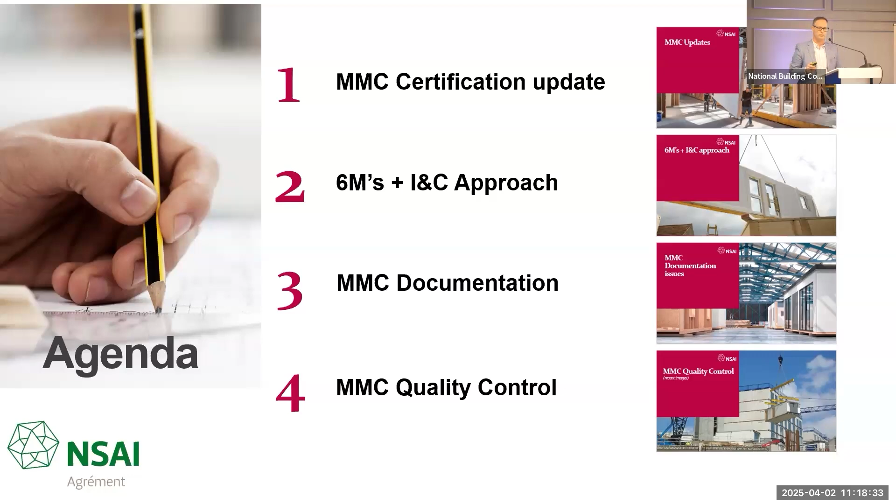So if I just move on to the updates, we have to go back to Technical Guidance Document Part D. That is where NSAI is referenced in Agrement certification. There is no European, there is no global standard for MMC. Yes, the BSI published the PAS 8700, but it's only for residential construction and it's only a publicly available standard. So for us to accelerate, what's happening is rules and regulations are trying to catch up with the advancement and innovation happening in the modern methods of construction space.

It's for any new or innovative building materials or systems or processes, and that's where Agrement comes into place. We were mentioned in the Programme for Government. We're here to support that, and we're to bridge the gap because there is no CE marking standard for MMC, and it's only for products. But we're looking at the whole building systems, all 67 building elements - the walls, the doors, the frames - and we're also looking at the interfaces.

So like what the previous speaker showed you, the connections, the points of connection, the interfaces - they're the challenges for us. And then there is a European technical assessment, but that is like a visa - it's only a visa to place the product on a European market. It's not your passport to install, because you have to look at the different climatic conditions, the different locations that are in. So we have radon, but we don't have seismic activities that the Italians have. We have the storm Éowyn that we had recently - they don't have that on mainland Europe in some cases. So you've got to adapt your systems to the area and climatic and local conditions.

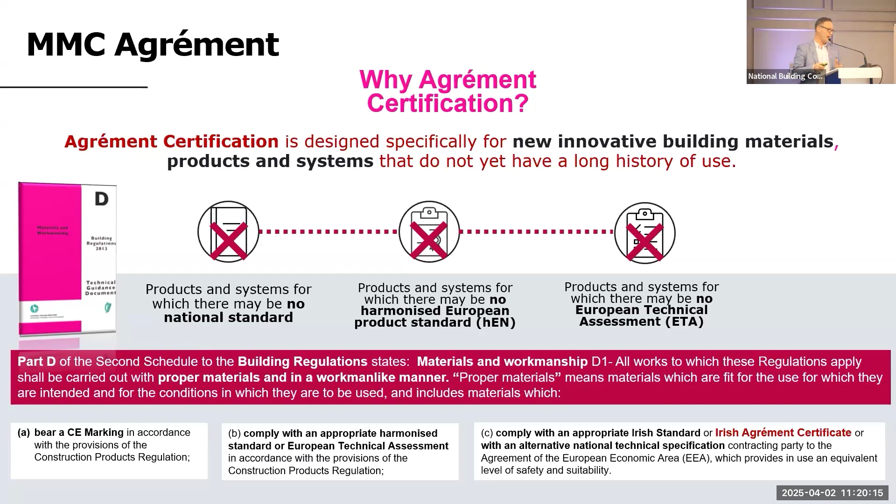And that's set out in TGD Part D. You then can have an Irish standard - we only have IS 440. There is a 3D concrete printing standard, but it's an ISO ASTM standard, and it's only general principles, so it doesn't cover all 3D concrete printing applications. And then you've got the Irish Agrement certification, which is to bridge the gap where there are no standards and regulations that I talked about.

But looking at the different companies, what I want you to look at here is very carefully - I haven't named the companies, but you can see the date of application and the material type in the second column. I also want you to look at the notes. So we have 7 stages within the Agrement certification process, and a lot of them are in technical review, but some don't come back to me - no correspondence since September 2024, no correspondence 2024.

We constantly reach out to these organizations - they've made an application, they've paid a fee, in some cases they've signed a contract with us, but there's no movement. And I can't make the move or can't move forward with them.

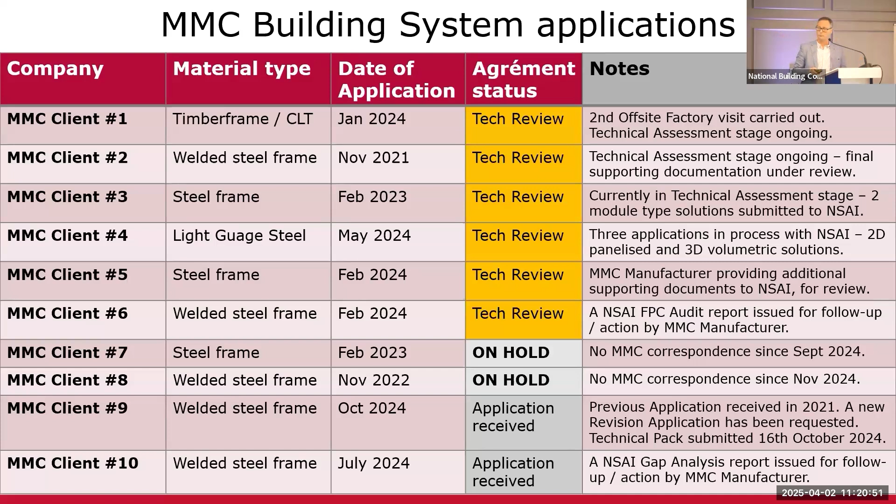We have other examples here of where they're at gap analysis stage. You can see the different types of steel frame - structured, welded steel, light gauge steel. Some haven't even confirmed what building system or technology they're going to use yet. You start to see ICF, mass engineered timber, structural insulated panels, precast, sandwich panels - so you're starting to see a good range here. Then some withdraw their applications or some want to put it on hold. We will have a kick-off meeting with them.

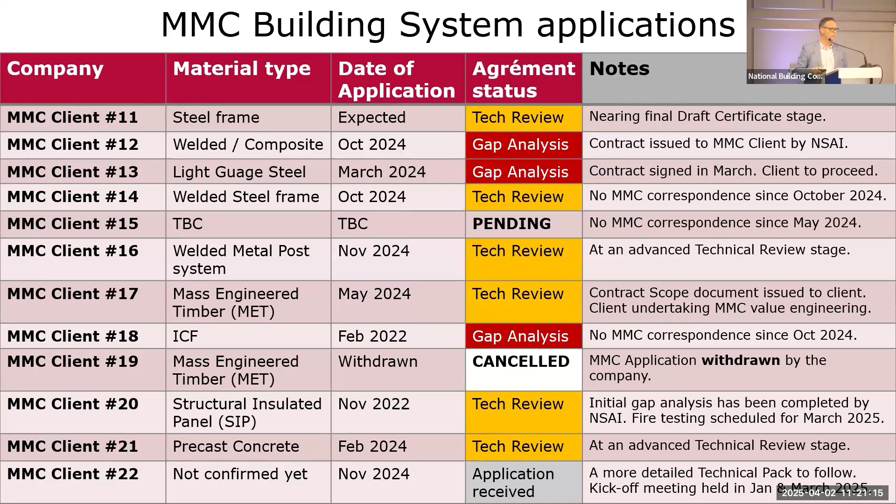We will work with the off-site manufacturers as best we can. There are different ones that have moved to gap analysis, and for us, we want them to get to the factory production control stage. This is where we're validating all their documentation, all their design, all the good stuff that they say they have. We want to verify that both in the factory and on site, and that's where the challenge starts coming into play.

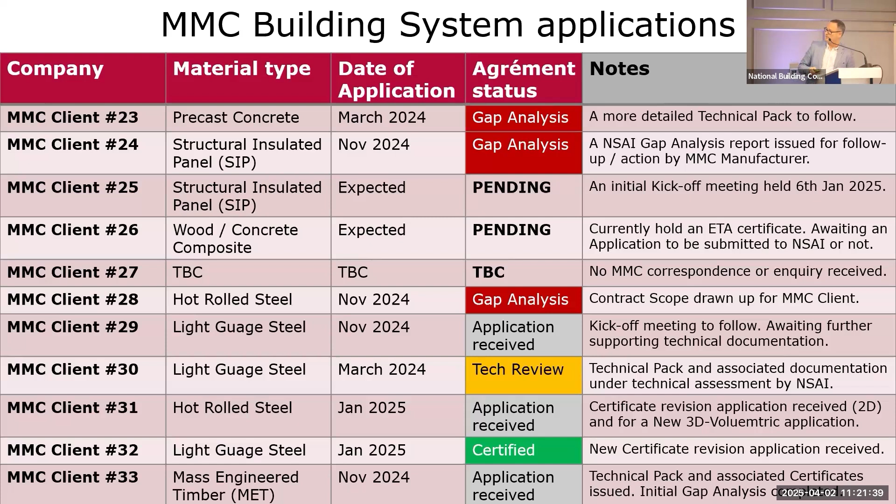But you can see where they're at: hot rolled steel, predominantly welded steel frame systems, and some people are just pending their application. It takes about 6 to 9 months from their initial inquiry to NSAI before they come into us and start the process. Then we do a gap analysis initially on what they submit, and it takes another 3 months before they give us a really detailed technical pack and we sign a contract with them.

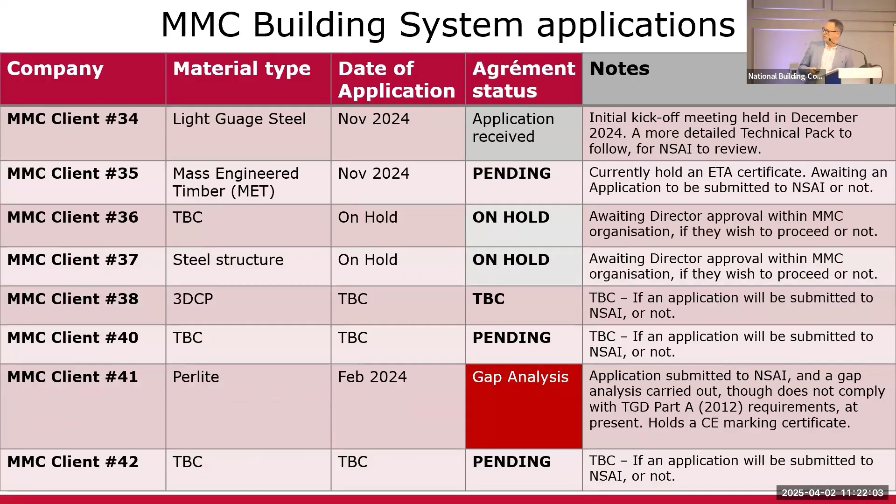So this is the challenges we're starting to see out there. For us, the summary is we want them to engage with us. Keep reaching out to us, reach out to our team. We're available, we're contactable. A lot of people have my name and number, they call me, whatever. We're happy to keep that process going. We're here to work with you.

We were set up under the NSAI Act 1996. We're also in our NSAI strategy to support SMEs, and we're in the programme for government to improve MMC certification. So that's what we're here for.

What we're also seeing is 3D volumetric systems have only started in the last 12 months. That's where it's starting to come into it. It's predominantly 2D panelized systems.

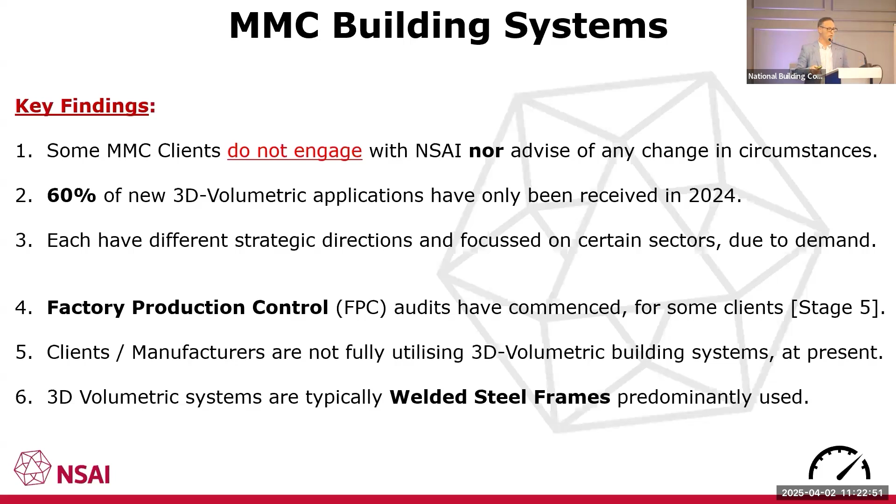What we see is when we get to the factory production control stage, we're at stage 5 of 7 - that's a real positive stage. That's when we know the factories are getting ready and they're going to be getting close to certification. We're looking at welded steel frames predominantly, although there's some mass engineered timber starting to make its presence here, possibly due to sustainability targets.

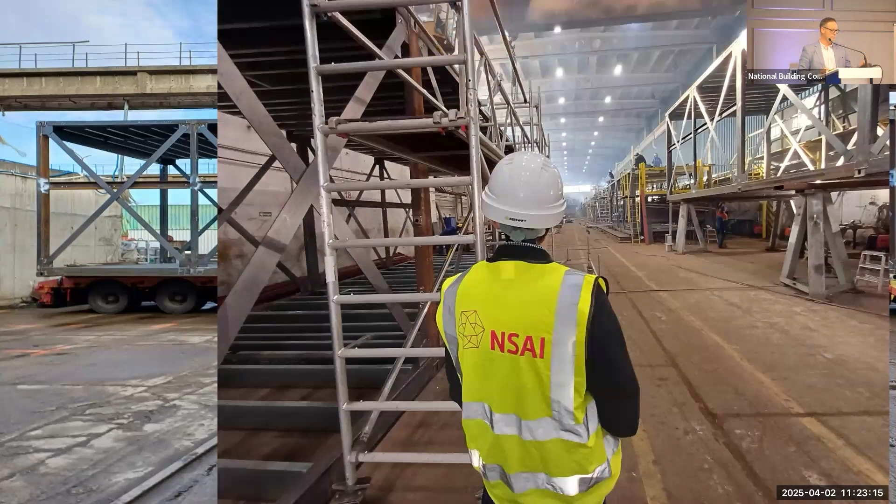This is looking down at the factory. This is one half of it, and there were 4 of them. You can see all the modules laid up all the way down the side and the guys working away in the crew.

This is some of the email comments I get back when I reach out to off-site manufacturers: 'Apologies, Martin, I'm working through the list that you gave me. I'm engaging with our clients and we hope to get back to you soon.' 'Martin, thanks for reaching out, thanks for your voicemail, thanks for your question, but we're not in a position to actively push forward with Agrement certification. However, can we keep our submission on hold?'

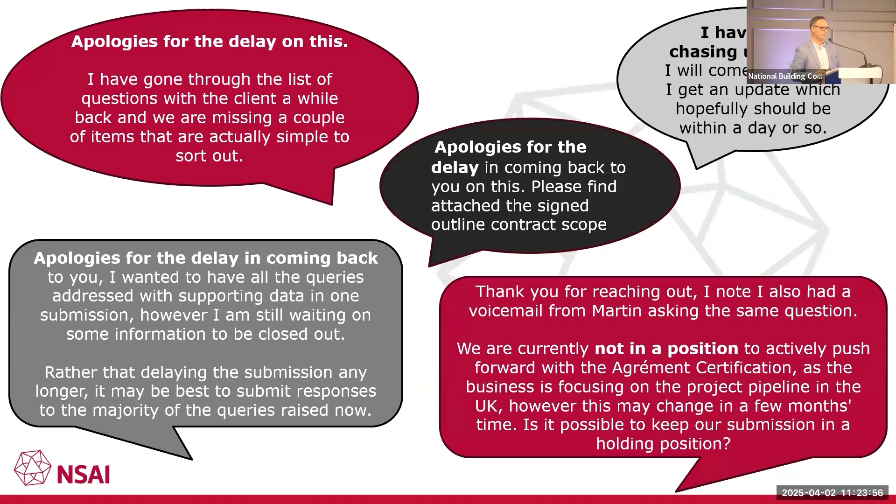This is the type of stuff - we want to work with off-site manufacturers, we want to work with them, but I can't move if they're not going to move forward. So it's a two-way street. You've got to come forward and present your documentation and we'll move forward with you.

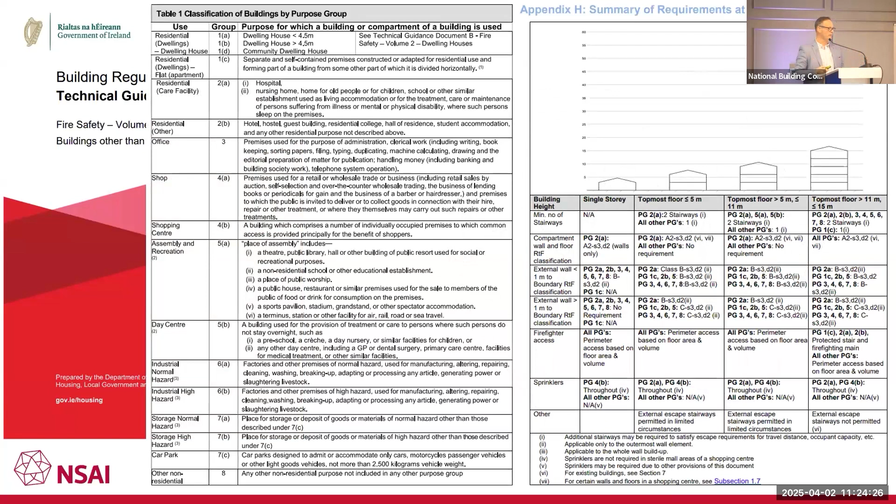What people always say is Agrement is not a one price or one fixed contract. No, it's not. It's based on the different purpose groups, the different heights of the buildings, the material technology and types, and the scale of the operation. So therefore, it can't be one size fits all - it's not a one size fixed price, fixed term contract. We need to scope that out with the various offsite manufacturers, and that will determine the length and depth of the certification process and technical assessment we have to carry out.

This is the 6 M's plus I and C's. I'll explain what that is in a minute, but I first want to talk about what is quality. This is a definition that holds true from 1978, and it still holds true to this day: it's the totality of features and characteristics of a product or service that bears on its ability to satisfy stated and implied needs. Very chunky, but I'll break it down for you.

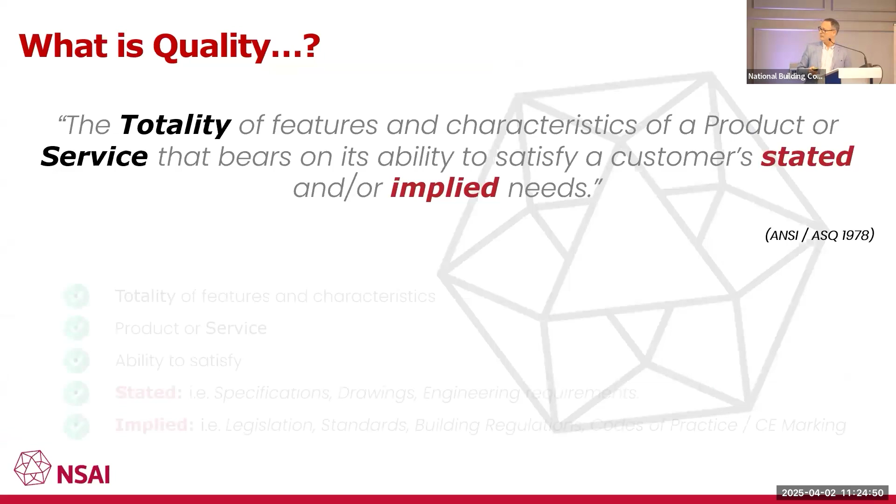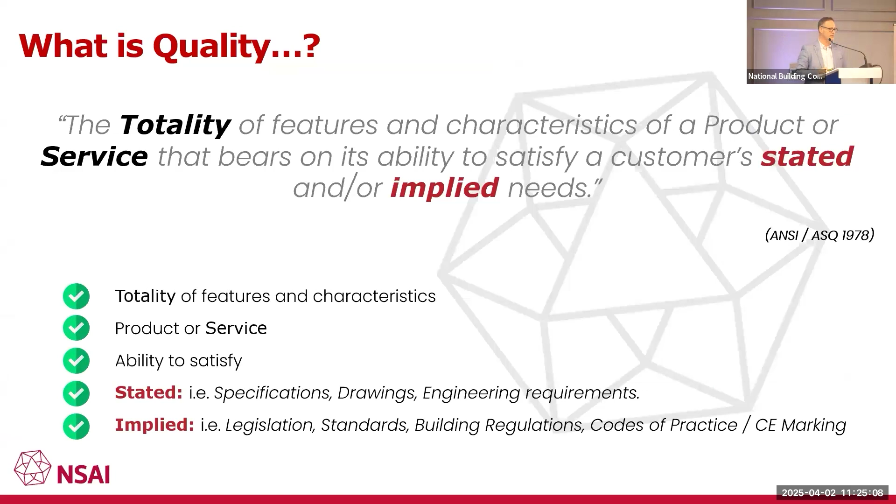What it is, is everything you do, the end-to-end process from this. It's no different to farm to fork, it's factory to site. It's the product that they're manufacturing, it's the ability, but it's not just the specifications, drawings, engineering, design. It is the legislation, the regulations, the standards, European directives, and the CE marking. It's everything to do with that, and the building regulations that we talked about earlier.

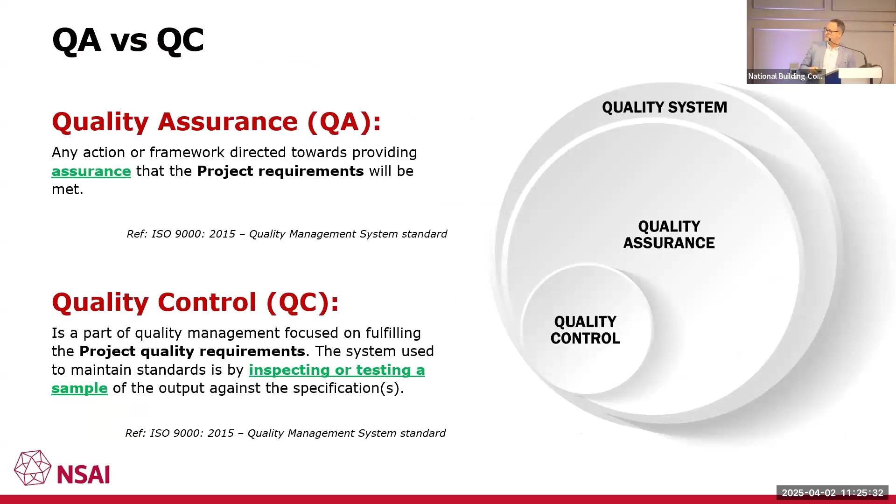Then you look at quality assurance, quality control. Everyone gets mixed up on this. The first one was quality management system and approach, but this is a definition from ISO 9000. It is an action or framework directed towards providing assurance, and quality control, as I always look at it, is materials and workmanship, both off-site and on-site, and how you control that. And it's inspection and testing of those samples, so you're taking a sample of that in the inspection process.

How that looks is we're providing a quality assurance scheme that is relied on by you as the certifiers, the regulators, the warranty providers, the insurers, and the regulator, the building control. And that's where it comes in.

But the BCAR is only on a project-by-project basis. So an example I give you, BCAR is not going to go to a factory in China. Are you going to travel over to China to look at some of our clients? Are you going to go to America? Are you going to go to Poland? Great if you are. But who's going to do the off-site inspections? Who's going to verify that? Who's going to validate all that documentation?

We get huge packs, over 10,000 pages on documentation. I'm happy to give it out to anyone here for them to digest and review technically, or you can rely on the Agrement certification to do that for you and support that. And that's what we hopefully rely on, and we want to work with people on that.

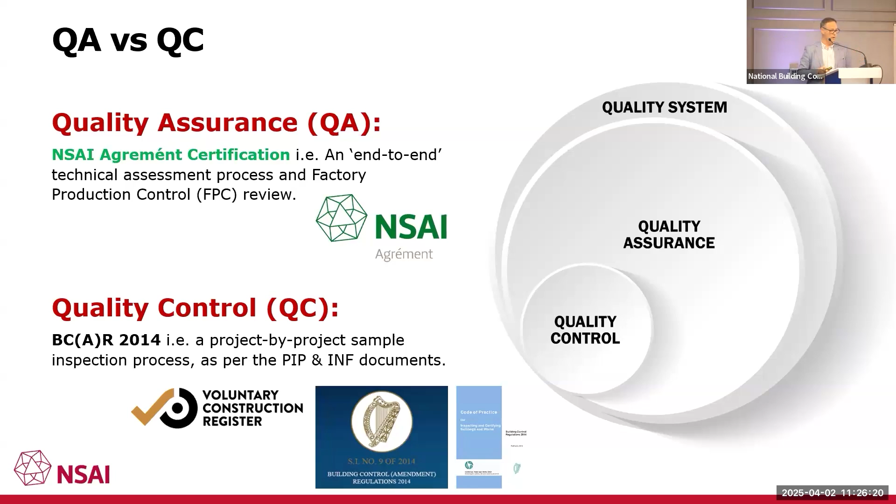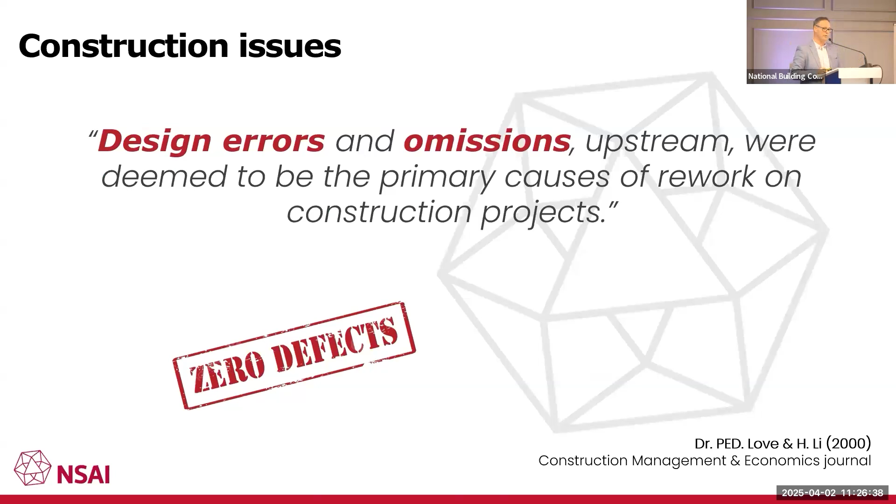And then I always use this definition. This is from Dr. Peter Love and Heng Li. They've written over 400 construction journals. He's in Australia and Heng Li is in Hong Kong. Design errors and omissions are the primary cause of rework in construction, and that is proven in multiple papers that they've published. And that's what we're trying to avoid.

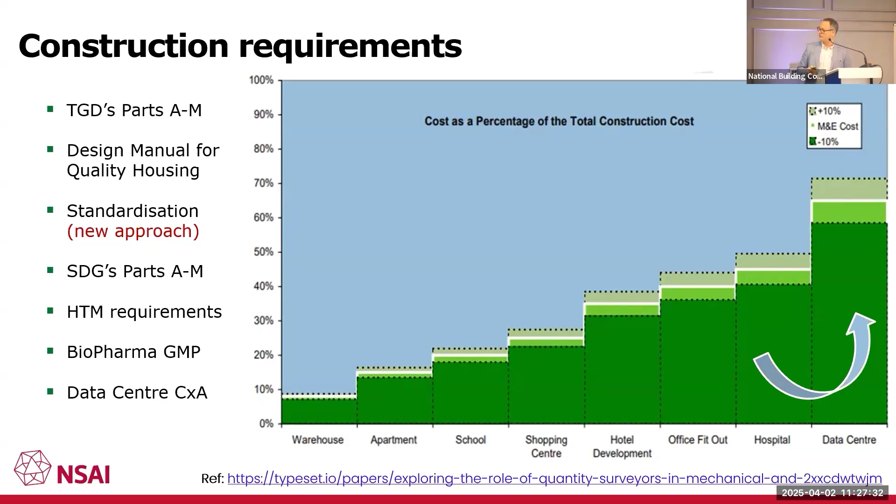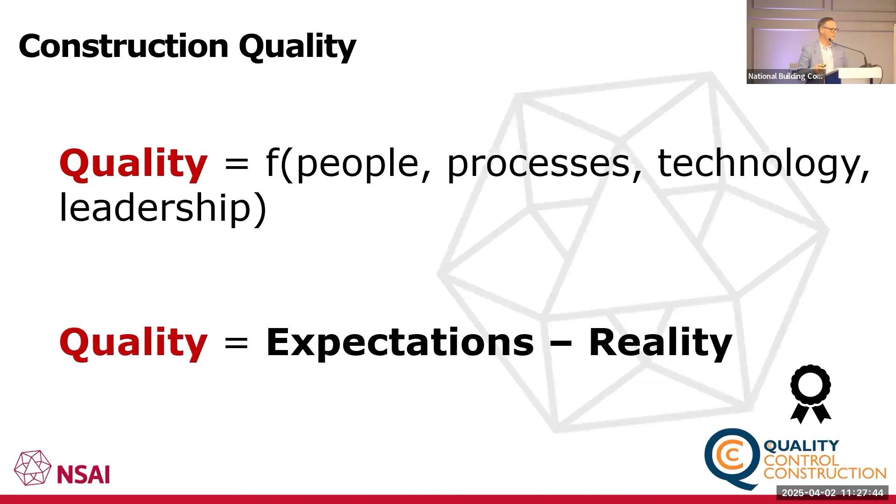For me, quality is a function of the people, the process, the technology, leadership, or more simply, quality is expectations minus reality. What are you actually getting for your off-site manufacturing, and what is in reality arriving on site, and is it fit for purpose and in use.

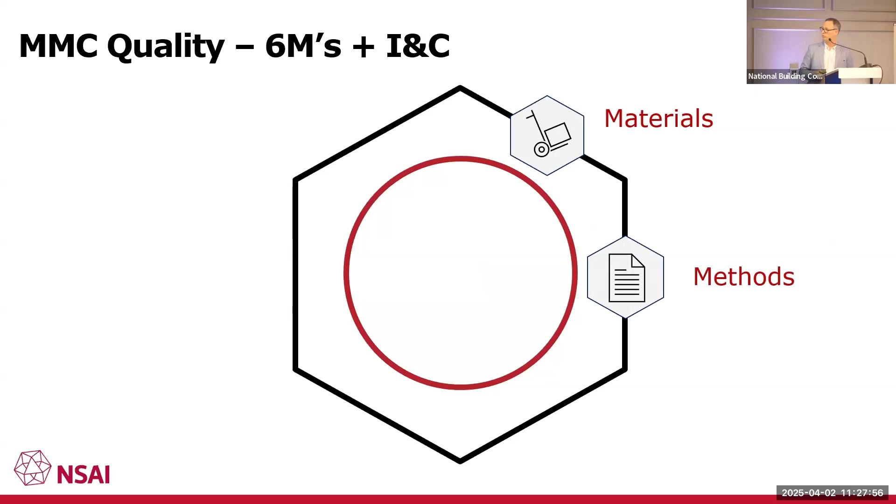So what I always do is 6M plus I&C. I look at the materials. I look at the methods that they're employing, both on-site and off-site. I'm looking at the manpower, the competency of both the design team, the professionals, and the trades. I'm looking at the equipment, the tools - is it calibrated, is it verified?

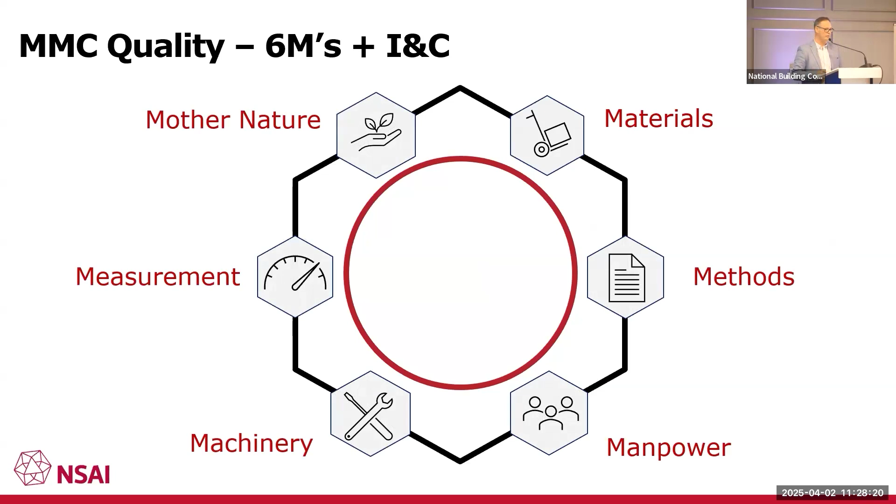I look at the measurement, and what I mean by that is inspection, testing, quality control records, the checks and balances. And I'm looking at how the weathering, the protection, and how that product will interact - is it UV rated, is it going to degrade over time? That durability that we talk about.

And then I look at continuously improving that process, and then how we communicate that. So that's my 6Ms plus I&C. It's project neutral, it's material neutral, it's sector neutral. I've applied this for the last 30 years on all the projects I've ever worked on, and it works out perfectly.

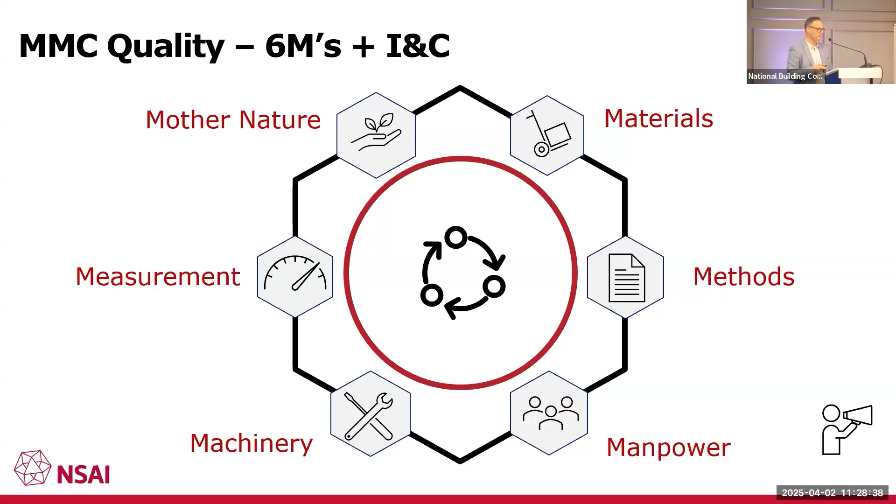And I challenge you to try that with your projects and processes. I'm looking at the specifications, the storing, the weathering, and protection of it.

Over, short, and damaged—does the module arrive? Has it got something too much on it? Is it missing something? Is there poor interconnection at the interfaces? I'll show you some examples of how this has happened.

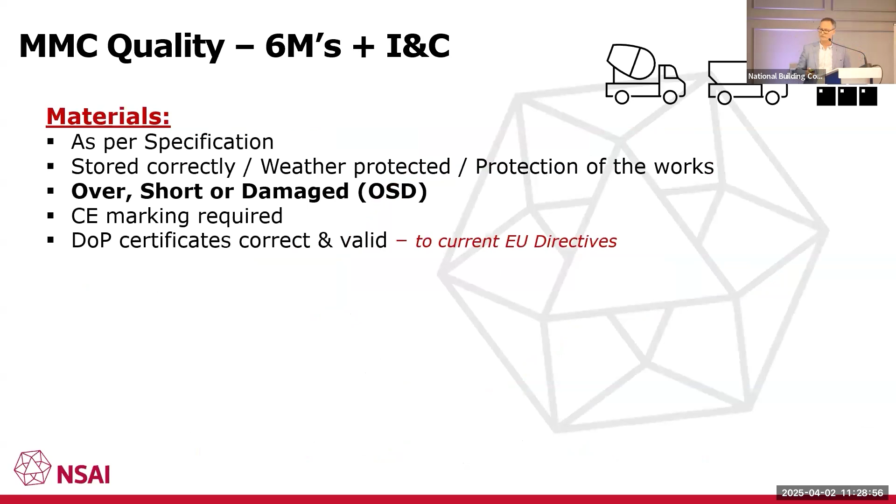Even though we have 3D modeling, this should not happen. Everything should be documented and detailed.

Has it got the CE marking? Has it got the declaration of performances? And are they checking it? Is it fit for the essential characteristics?

We're also looking at the contract scope of works. Has there been any variations and changes? Looking at the models, looking at requests for information, technical queries, and we're keen on the standard operating procedures.

It's the offsite manufacturer's processes. We're not here to challenge and question that, but we want to see it. We want the evidence, we want to see the validation, we want to see the verification of that. Trust me, I'll go into full detail on this.

I want to see it in the PIPs and the INFs. I want to see offsite manufacturing captured in that and the stages of inspection. Where is that? And is it there? I do see it in some of it.

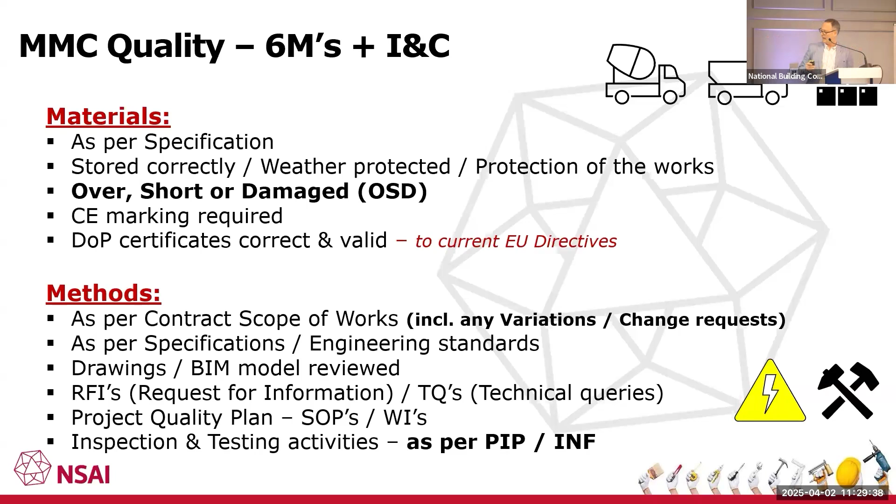I'm looking at the qualifications. What we mean by qualifications is in TGD, the definition—are they competent? Competent involves qualifications, knowledge, experience, and skill. That's what we're looking for. It's a combination of all of them.

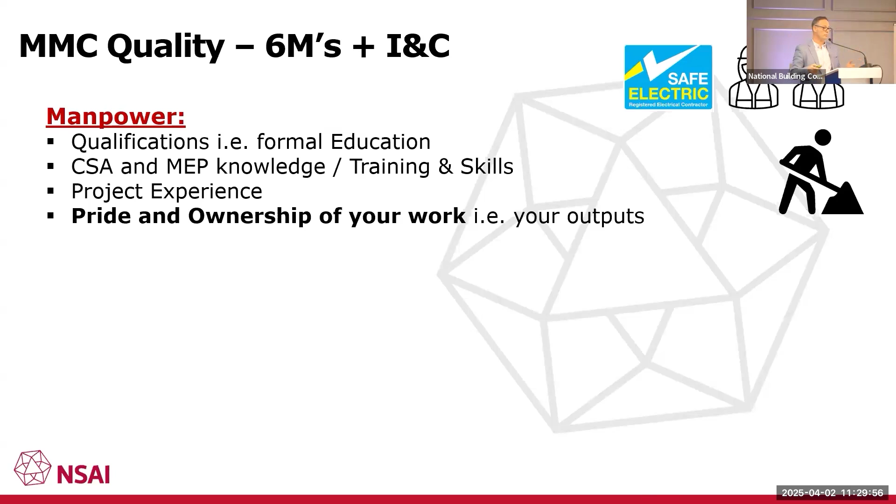The problem with experience and skill is that modern methods of construction are new. So we all have to upskill, we all have to get more knowledgeable around this, and I'm learning every day.

And then it's taking pride and ownership in that. But it's also having the right tools to do the job. So we're looking at the torquing, the bolting, the assembly, the points of connection. That's when a modular is going to fail—at the interfaces.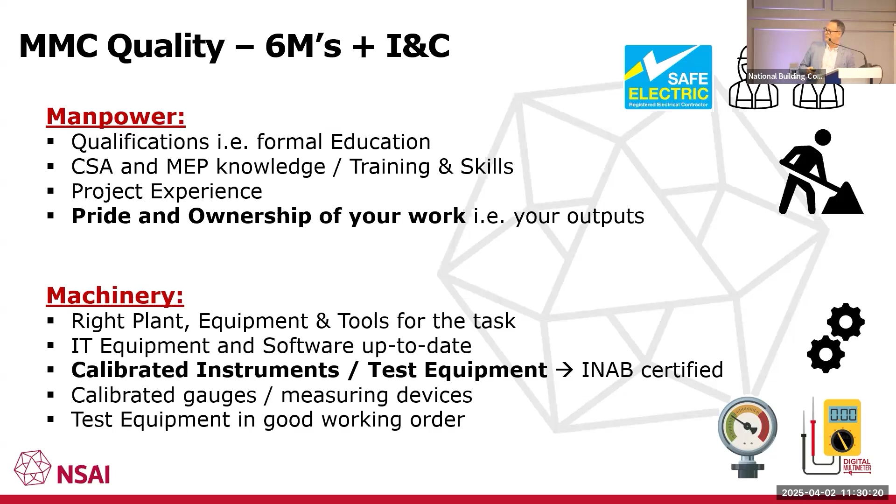If you look at any of the reports over in the UK, it's at the interfaces—it's where things come together. We're looking at whether the equipment you're using is calibrated, the gauges, and whether they're all in working order.

And then finally, we're looking at the quality control checklist, the test packs, the evidence that verifies or validates. That's the track and trace. I don't mind if it's pen and paper, I don't mind if it's digital, I don't mind if it's on an app.

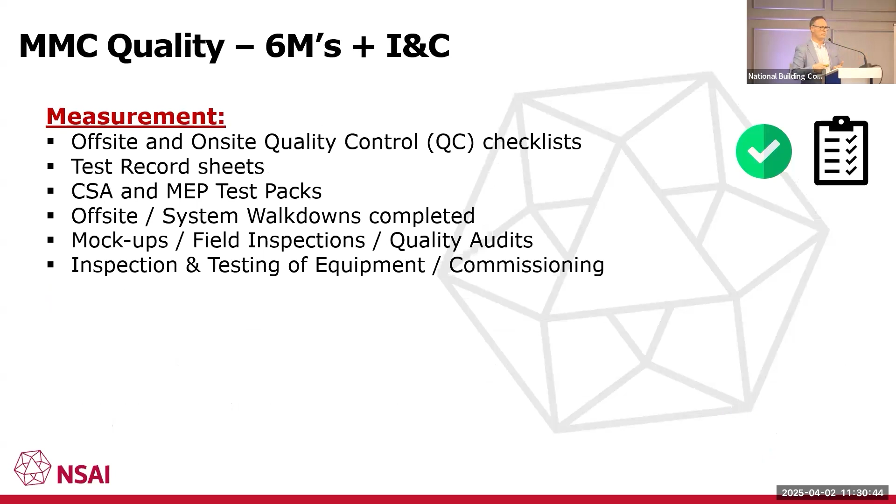But what we do is go into the factory and they tell us all about these wonderful checks. We get to the end of the process and we start seeing errors in the modules and things. And I said, but you just told me we go through 100% checks. And yet we see gaps and errors in the process and the system.

And then Mother Nature—be very careful. Program affects how people operate. When you start putting things under pressure, people perform differently.

So it's the environment, the culture, and that's why factory production control lends itself to offsite—it's a nice controlled environment as opposed to on-site, chaotic, multiple trades. But you're also looking at the weather, the temperature, and that's why off-site manufacturing lends itself to drive improved productivity, and that's been proven in numerous reports.

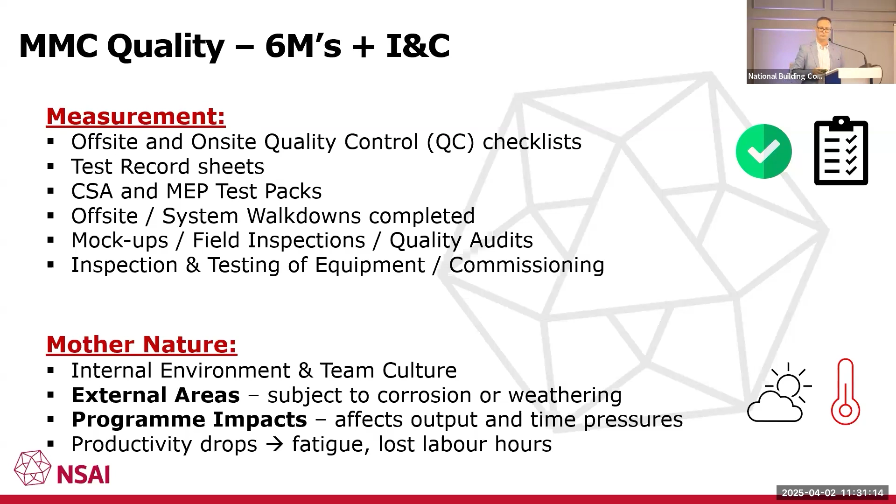Don't look at the symptoms, look at the root cause of the problem, drill into it, and try to prevent it. What I do is the reverse of that. It's nothing new or novel or innovative.

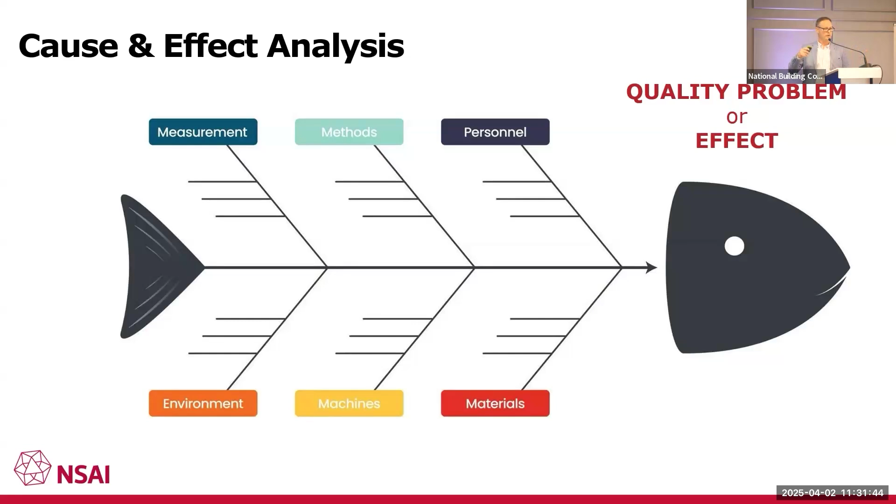It's very simple. What you're trying to do is get into a nice zone of control. You're taking out these sporadic spikes, these unknowns or variables, and you're driving that quality improvement. But what's key is you've got the lessons learned, the feedback loops. The best organizations are feeding that back from the offsite activities into their production, into their crews, and they're constantly improving.

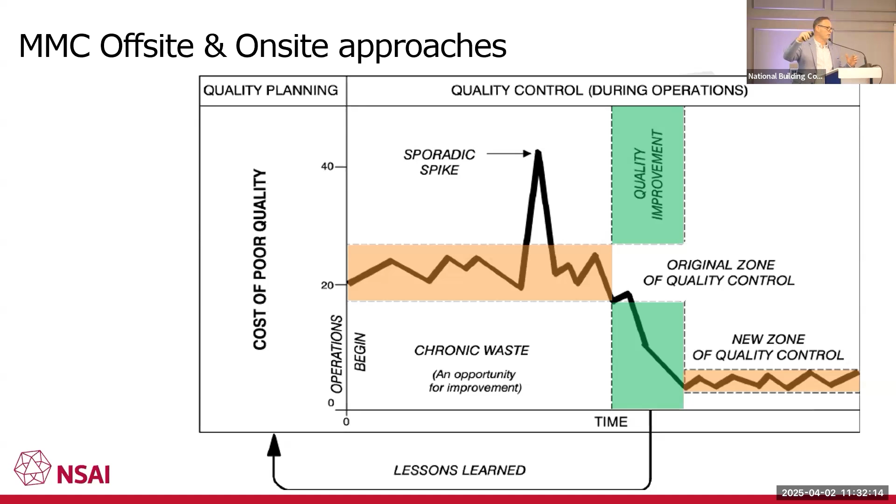You'll see that with the offsite manufacturers, I see a maturity level with a lot of these companies. Some are really good and innovative, and others are quite stagnant and slow and don't take those feedback loops and learn from the process.

Just to touch upon some of the documentation we're starting to see out there and the issues. We're looking at everything - durability, thermal, structure, fire - not just the TGDs A to M. We're looking at the competency of the people, test results, calculations, quality control manuals, installation manuals, and the maintenance around that. Because once the module's finished and installed on site, we want to see how it's maintained post-production and post-occupancy. So be careful of that.

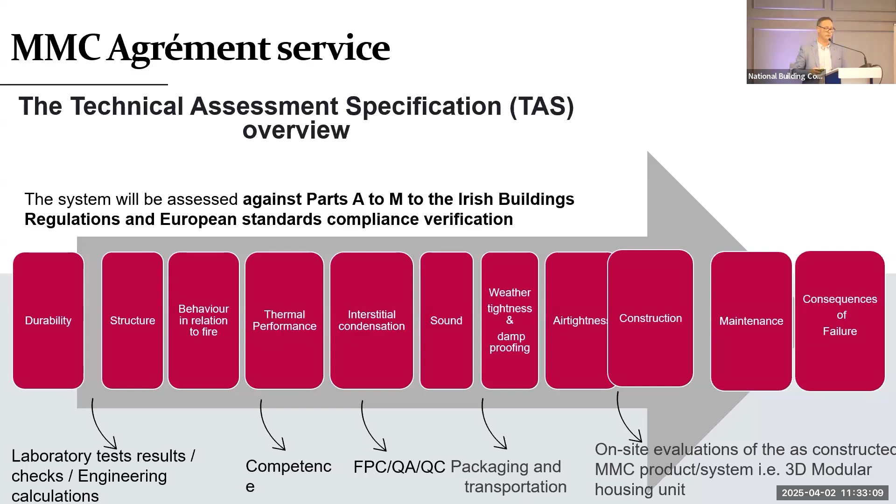My three challenges - this is the slide I want you to take away from today. Documentation doesn't always match what it says in the tin. The amount of times I get pieces of paper, out-of-date documents, documents that don't match the essential characteristics. I challenge you all to look at this documentation - look at the devil in the detail.

Look at the European Technical Assessment. What does it cover? What doesn't it cover? What's in the manufacturer's instructions? What's in the literature? Factory production control - 80 to 90% of where it is.

So when we go to the factory, it's not bad - it's getting better, it's improving. But we still see errors out there. We see some very basic checks that weren't done or carried out, small attention to detail - and that shouldn't be happening on the production floor, using the right jigs.

But they are improving. The on-site is not where it needs to be - it's not at the standard or level. It's like a curbside delivery - they drop the modules in or drop the 2D panelized systems and a different team or crew takes it over. The control around that and the interfaces with the various trades is not there. I don't see it as strongly controlled as it would be in the factory, and it's an area we need to look on.

We need to look at the points of connection, even the mechanical and electrical, and how that interfaces with the module. I've seen them compromising some of the modules. It was my fear, and that's what I'm starting to see on the sites now. So I will be pushing in on that, and I will be doing unannounced visits on some sites.

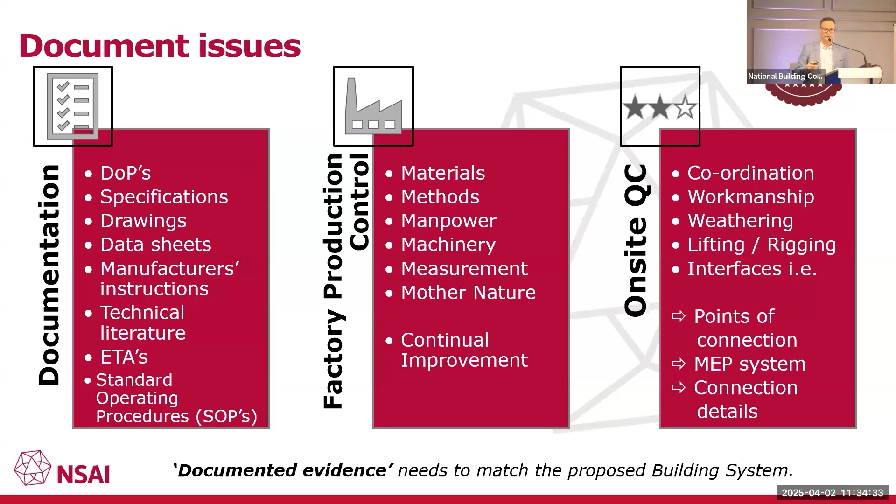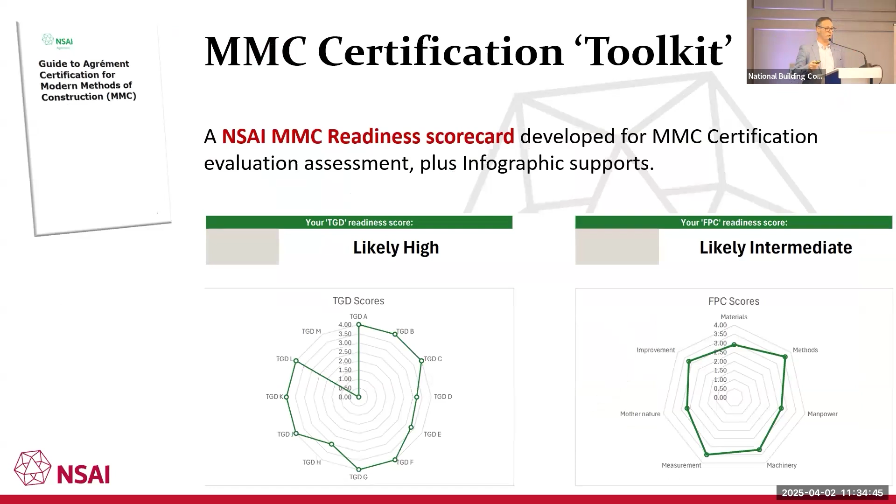We have a readiness scorecard to help organisations. It's freely available, it's a self-assessment against the TGD's Part A to M, and also against factory production control readiness. We score it against what the off-site manufacturers provide to us, and it gives you a nice radar diagram that tells you where your gaps are.

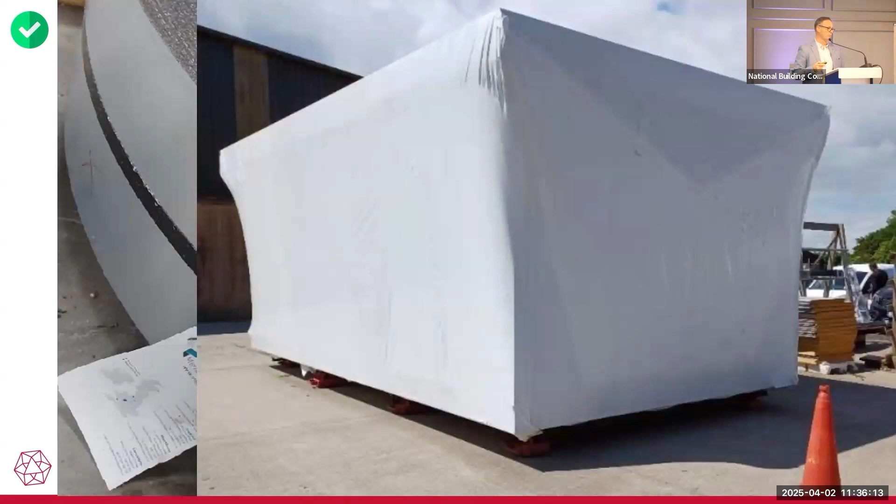Just to wrap up, I want to show you some recent images we've seen. We see some good stuff with light gauge steel - we can see the material traceability, the mill certs, and the material. We can also see that they weather the products better. Really good companies are weathering their modules now, which is what Mario talked about - the weathering of moisture. Moisture is going to be your biggest trouble with these modules and getting exposed to the climatic conditions here.

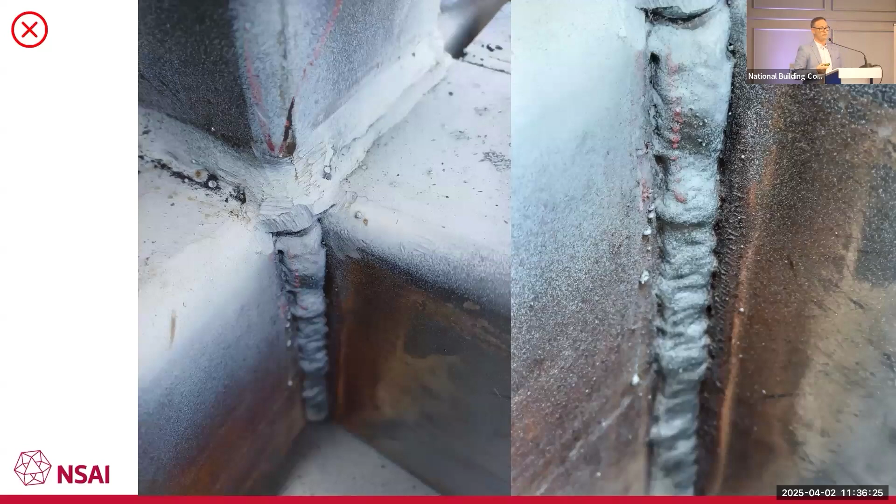This is a weld. We'd gone to a factory and asked them what inspection levels they do - 100% visual and 10% non-destructive testing. The white paint is magnetic particle inspection, a form of NDT. That was for the other welds, and this is the quality of the weld I got.

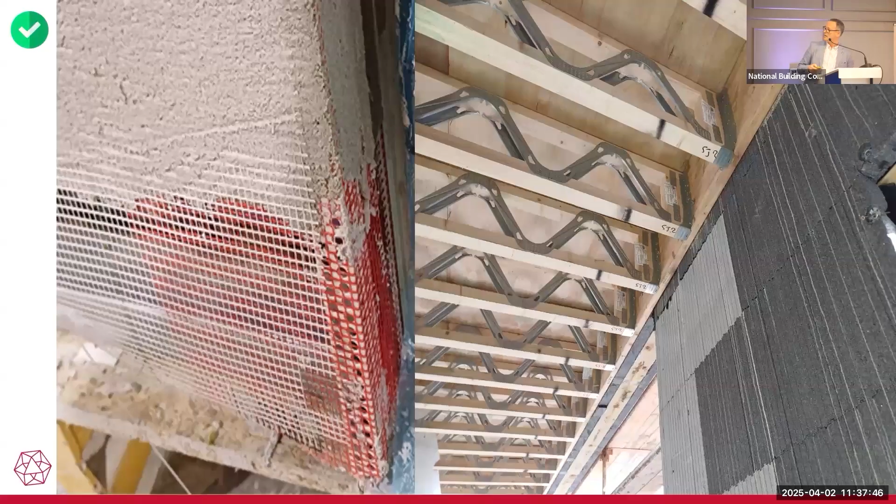This is another site with ICF. But then I see some really good stuff in the factory where they were doing the rendering, putting on the mesh, putting on the base coat, and they can see that they're doing the posi joists in the correct orientation on the ICF - so they can do some good stuff. It's that education, training and knowledge piece that I talk about with the checks and balances.

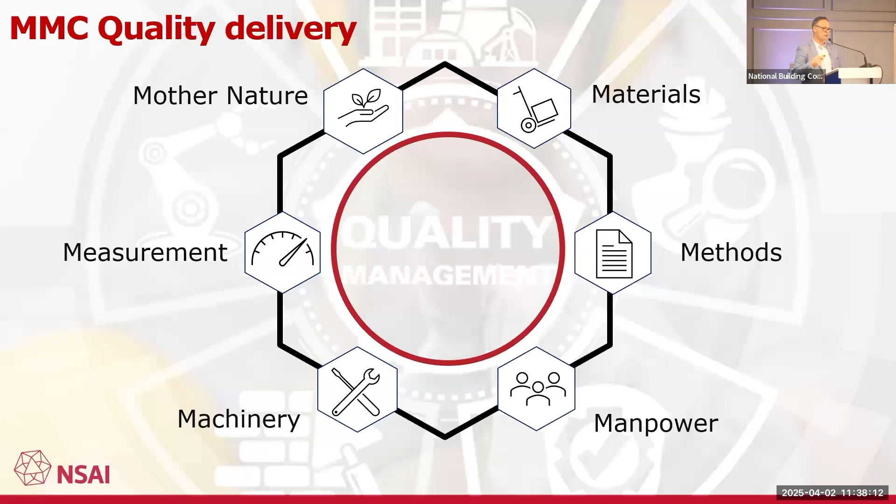So just to wrap up in summary, for me it's about looking at these six key elements. If you are doing any inspections, audits, assigned cert or design cert roles, do go to the factories, do apply this methodology - I'm telling you it'll work really well for you and always continuously improve. So thank you very much.